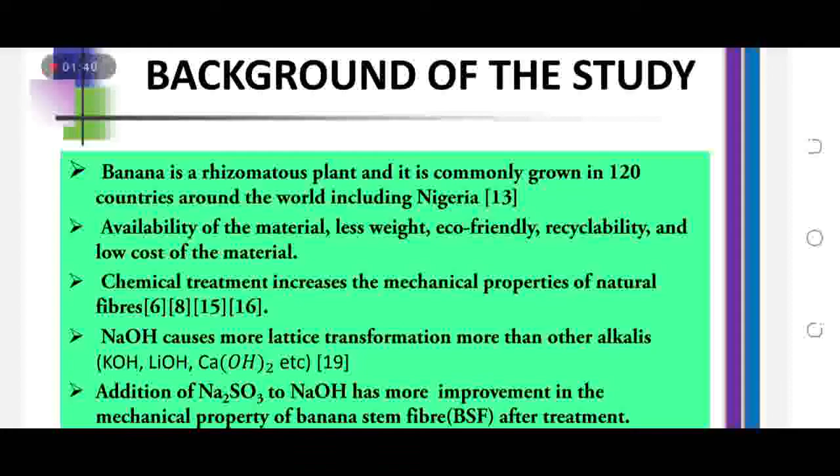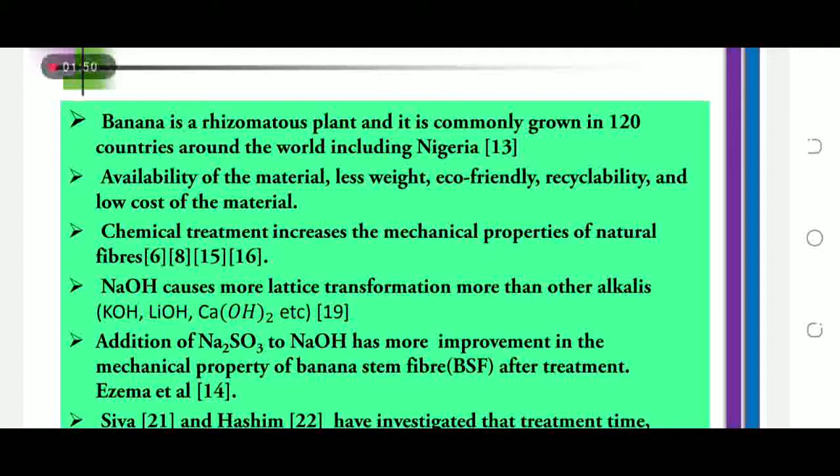Background of the study. Banana is a rhizomatous plant and is commonly grown in 120 countries around the world, including Nigeria. It's available all year round and is eco-friendly and can also be recycled, and it's also a low-cost material.

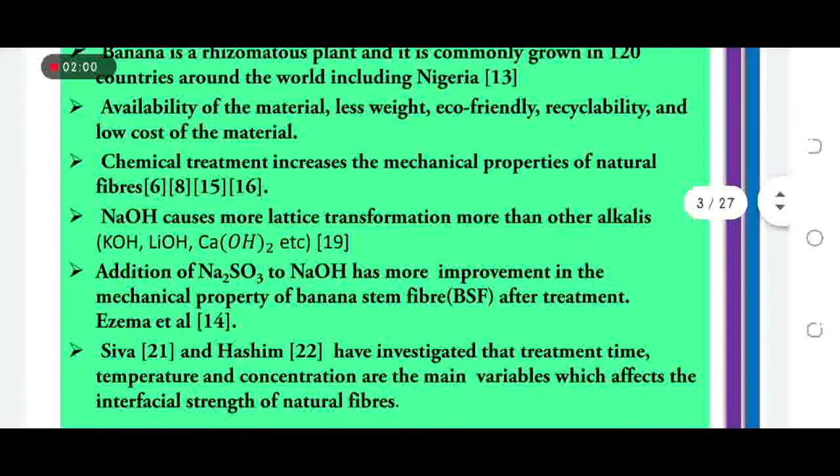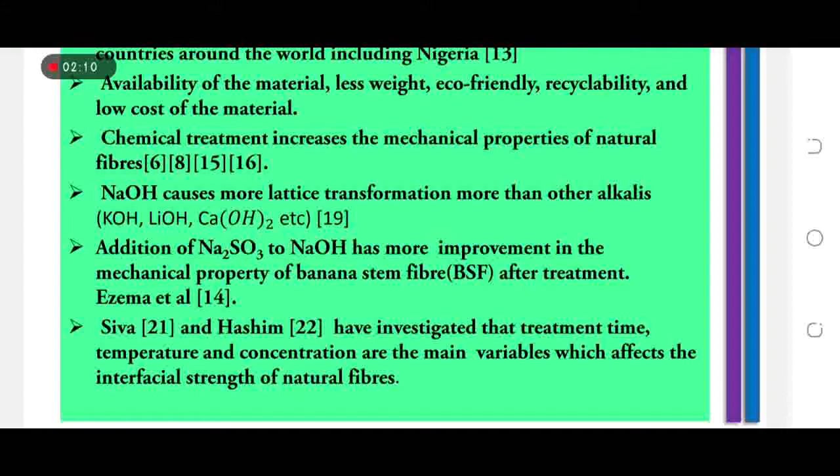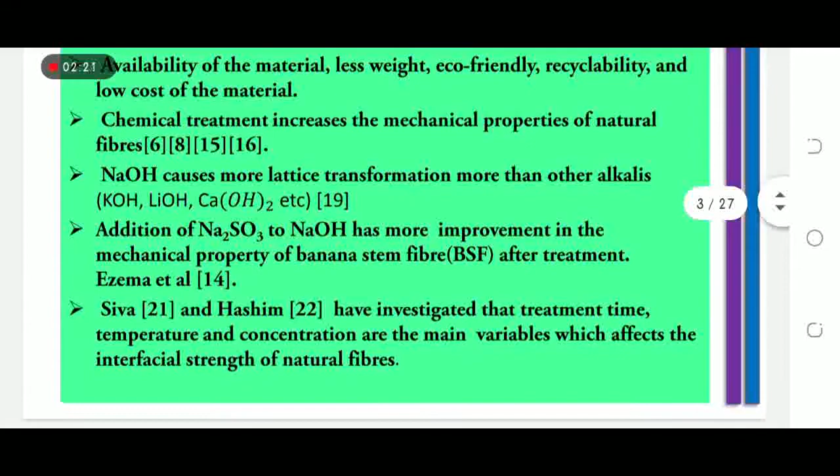It has been established that chemical treatment increases the mechanical properties of natural fiber. Sodium hydroxide causes more lattice transformation than other alkalis such as potassium hydroxide, lithium hydroxide, calcium hydroxide, etc. In a separate research done by Ezema et al., we found that addition of sodium sulphite to this sodium hydroxide had more improvement in the mechanical properties of the banana stem fiber after treatment.

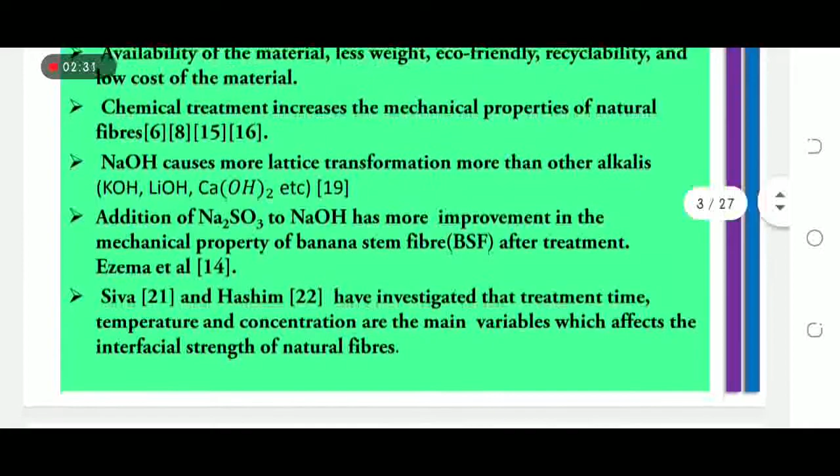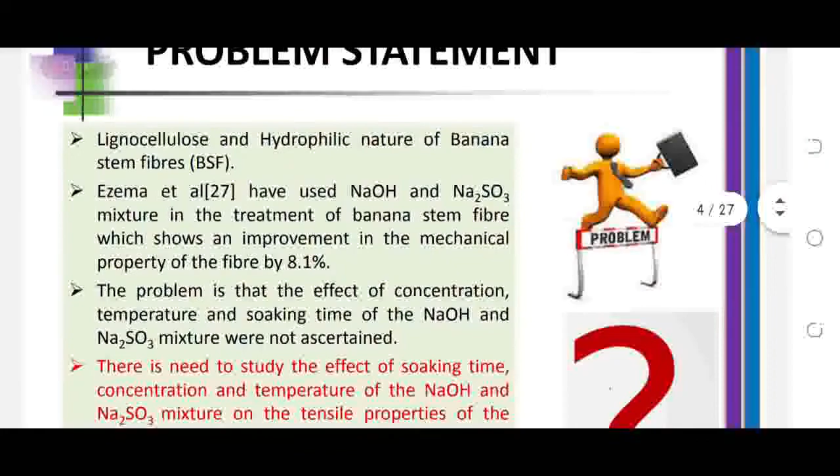Siva and Hashim have investigated that treatment time, temperature, and concentration are the main variables which affect interfacial strength of our natural fibers. The lignocellulose and hydrophilic nature of banana stem fibers is what hinders them from being used as a reinforcement material in composite, because they absorb moisture and there is no interfacial bonding between the fiber and the matrix.

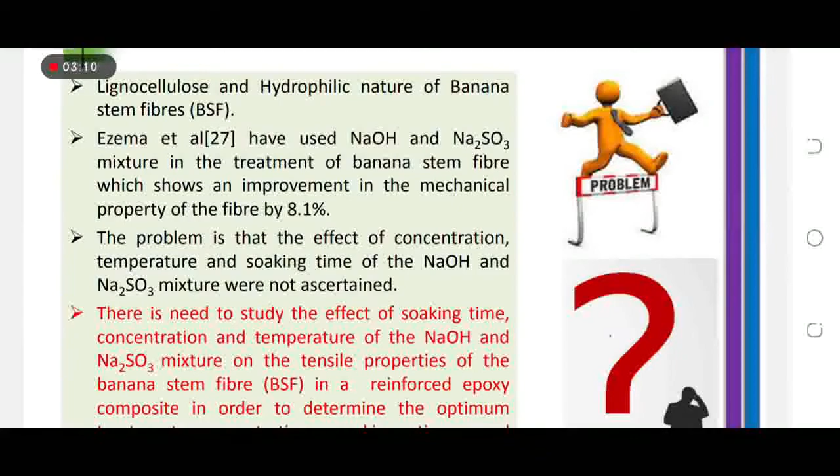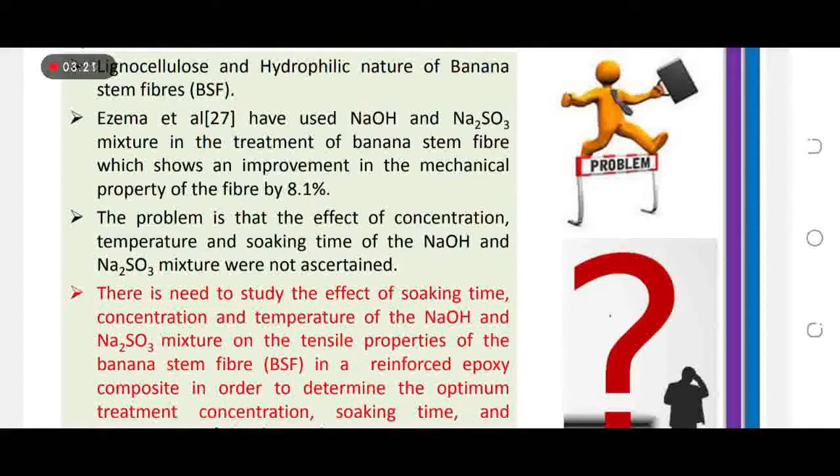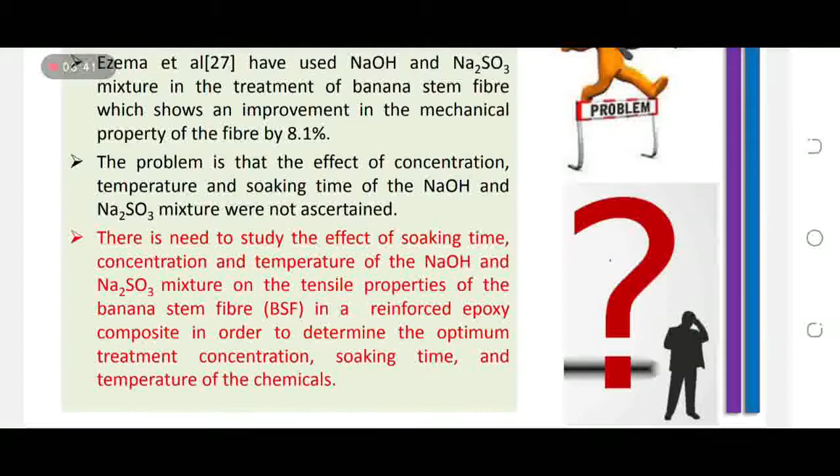So Ezema et al. have used sodium hydroxide and sodium sulphite mixture in the treatment of banana stem fiber, which shows an improvement in the mechanical properties of the fiber by 8.1%. The problem is that the effect of concentration, temperature, and soaking time of the NaOH and sodium sulphite mixture were not ascertained. So we find that there is a need to study the effect of these parameters in NaOH and Na2SO3 mixture on the tensile properties of the banana stem in a reinforced epoxy composite in order to determine the optimum treatment concentration, time, and temperature of the chemicals.

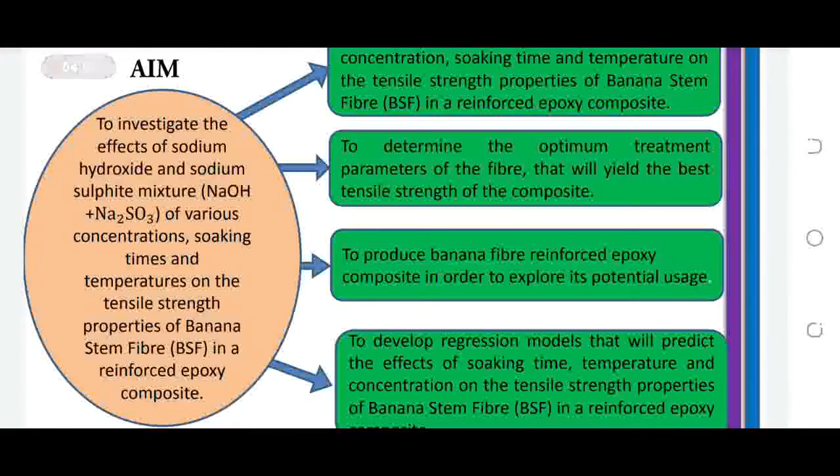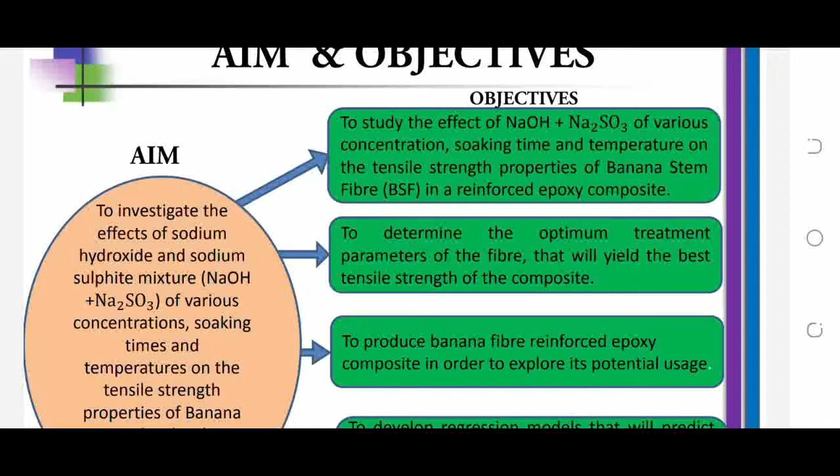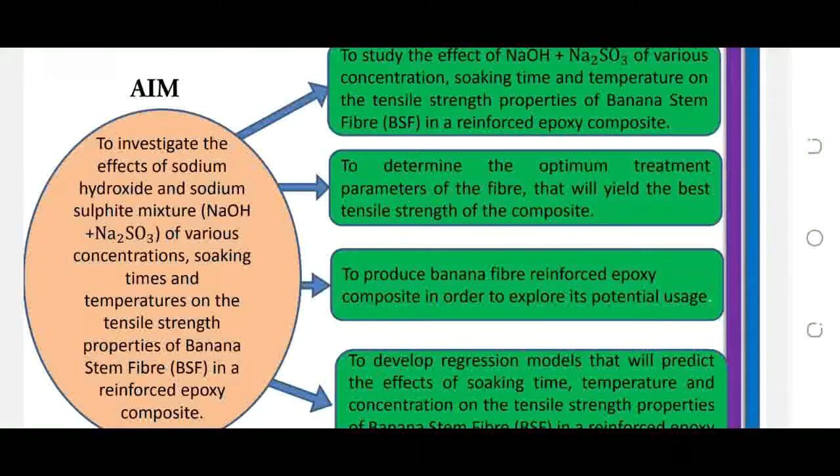Aim and objective. The main aim of this study is to investigate the effect of sodium hydroxide and sodium sulphite mixture of various concentration, soaking times, and temperatures on the tensile strength properties of banana stem fiber in a reinforced epoxy composite. The objectives are to study the effect of NaOH plus Na2SO3 of various concentration, soaking time, and temperature on the tensile strength properties of banana stem fiber, and to determine the optimum treatment parameters of the fiber that will yield the best tensile strength of the composite.

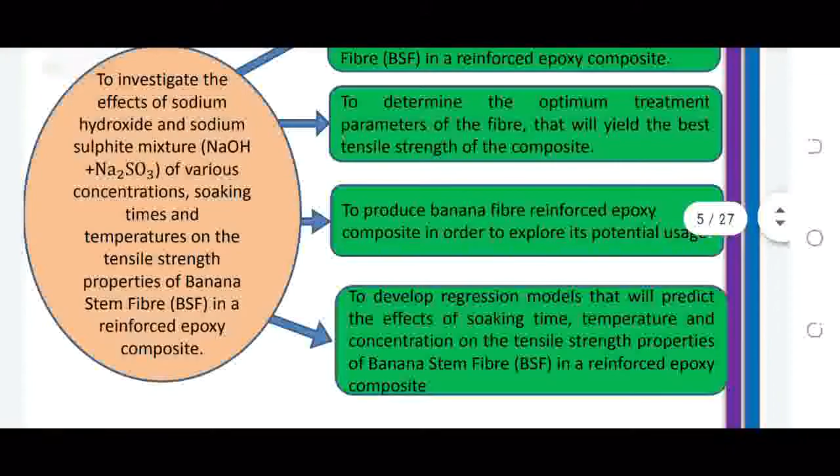The third objective is to produce banana fiber composite in order to explore its potential usage. The fourth is to develop regression models that will predict the effect of soaking time, temperature, and concentration on the tensile strength properties of banana fiber in a reinforced epoxy composite.

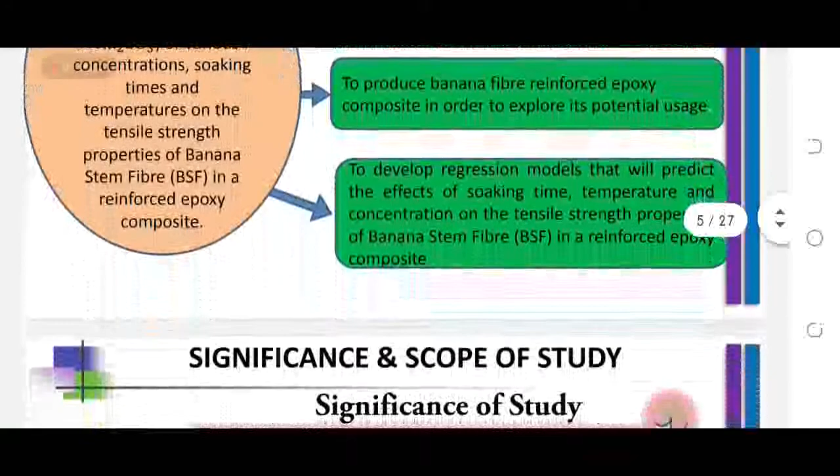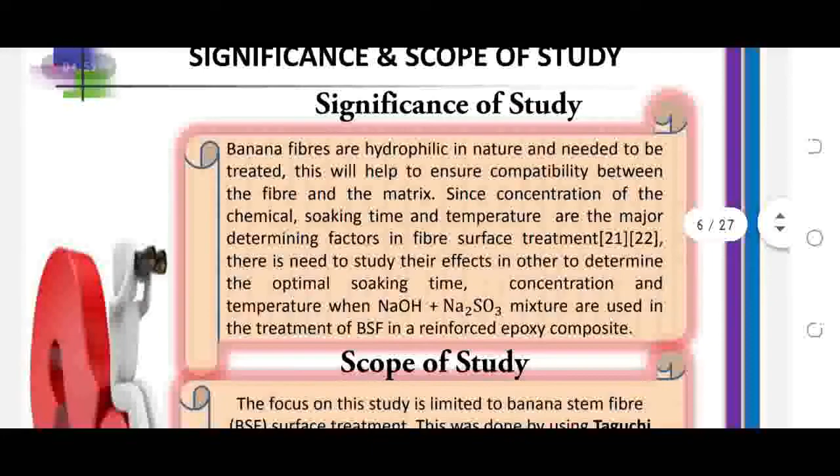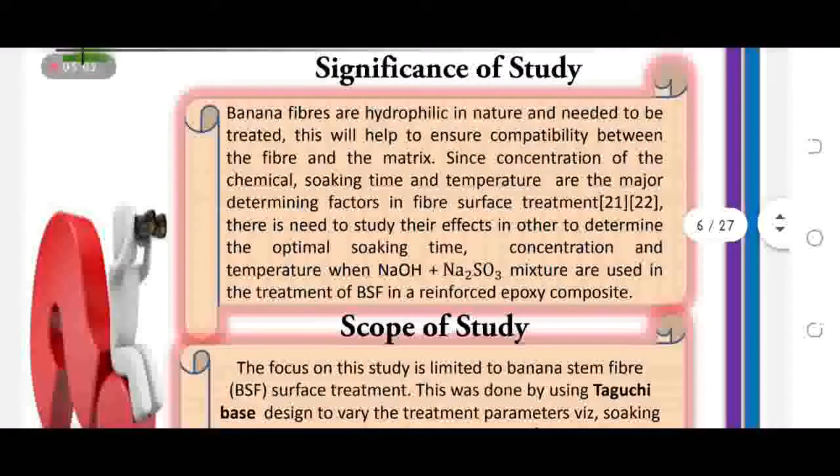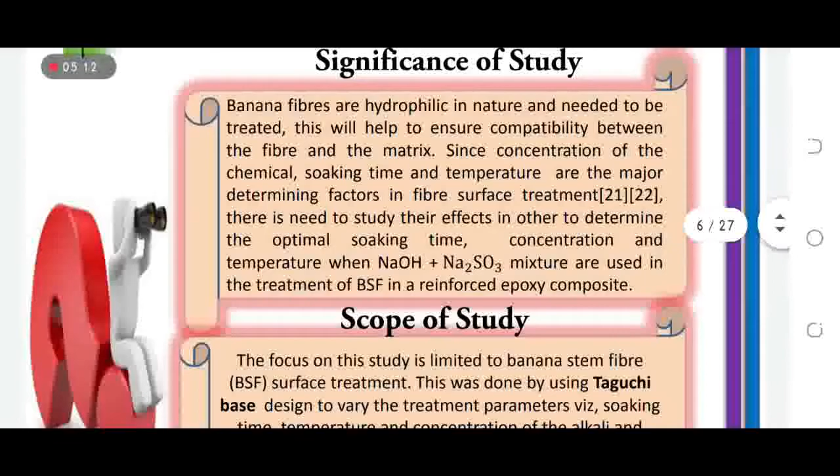Significance and scope of this study. The significance is that banana fiber is hydrophilic in nature and needs to be treated. This will help to ensure the compatibility between the fiber and the matrix. And since concentration of chemical, soaking time, and temperature are the major determining factors in fiber surface treatment, there is need to study the effects in order to determine the optimal soaking time, concentration, and temperature of the two mixture of chemicals that will give us the best treatment parameter in the reinforced epoxy composite.

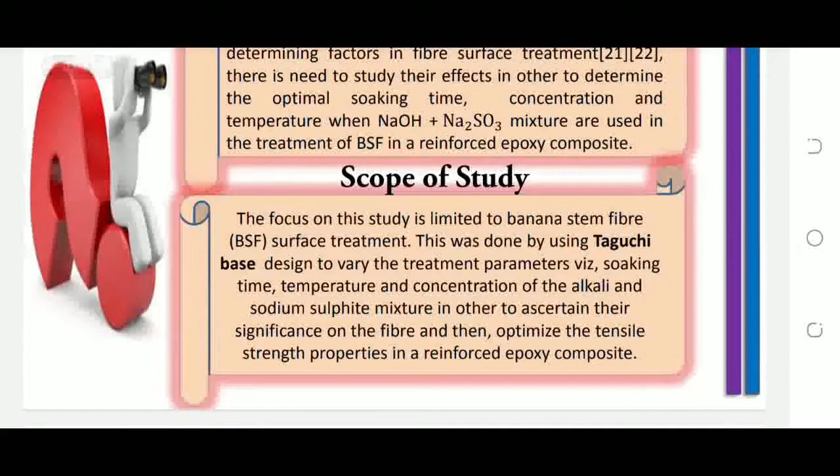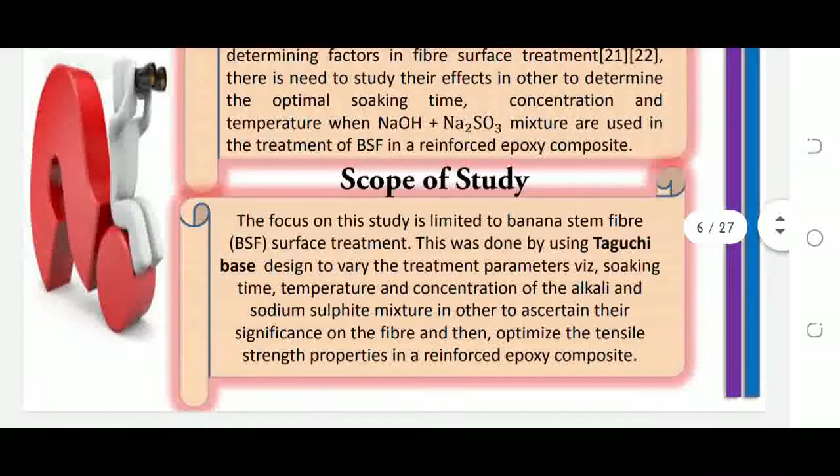The focus of this study is limited to banana stem fiber surface treatment. This was done using Taguchi-based design to vary the treatment parameters: soaking time, temperature, and concentration of the alkali and sodium sulphite mixture, in order to ascertain their significance on the fiber and then optimize the tensile strength properties in the reinforced epoxy composite. That's our scope for this study.

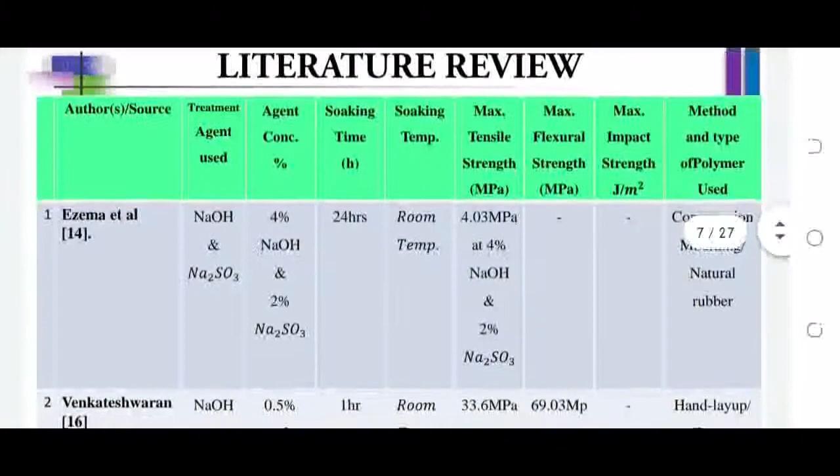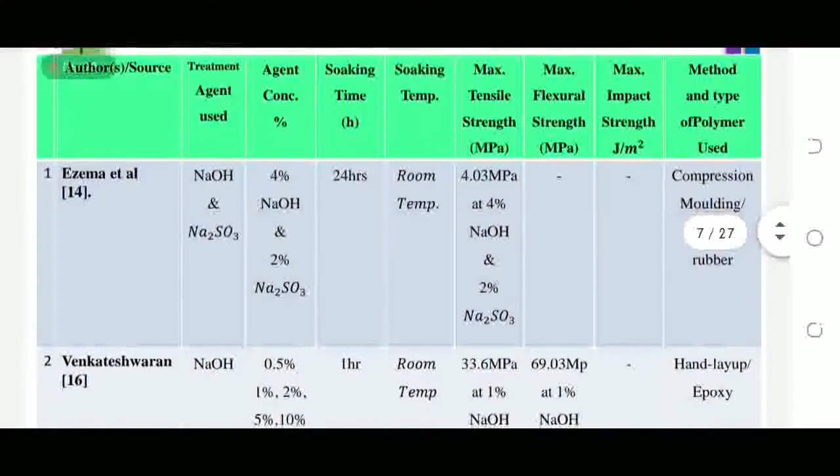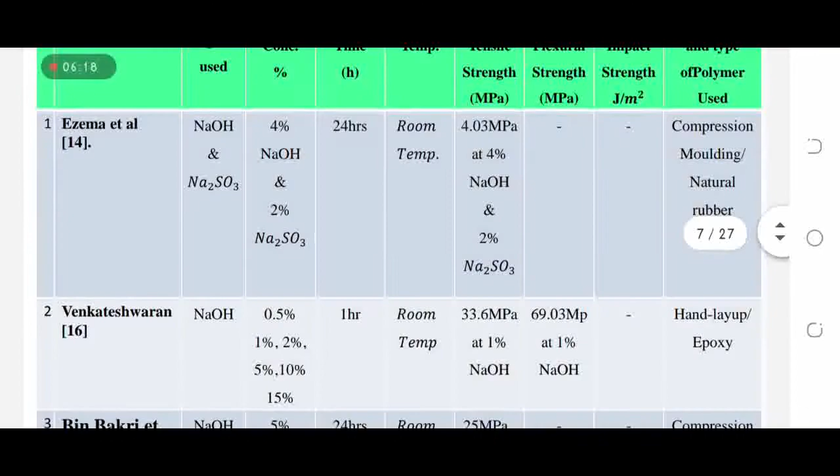Literature review. We saw that Ezema et al. treated with sodium hydroxide and sodium sulphite for 24 hours with a concentration of 4% for sodium hydroxide and 2% for sodium sulphite, and the maximum they got was 4.0 megapascal at 4% and 2% of the reagents. Venkateshwaran also did the same thing, but he treated with only sodium hydroxide, and at 1 hour he got 33.6 megapascal at 1% of the sodium hydroxide.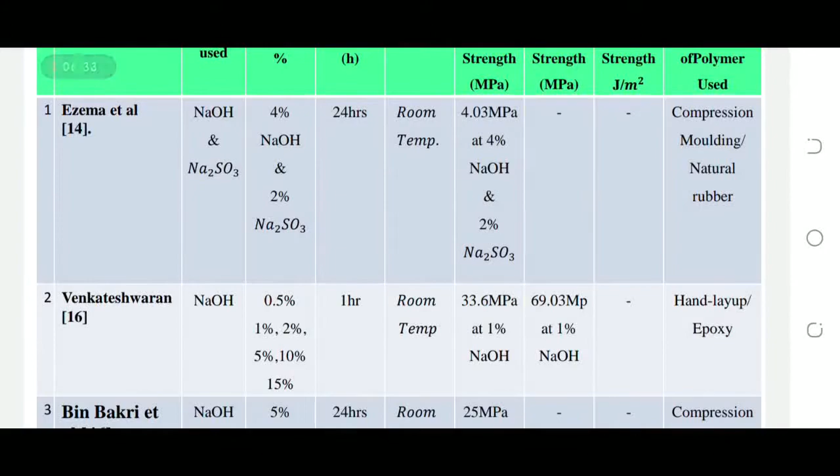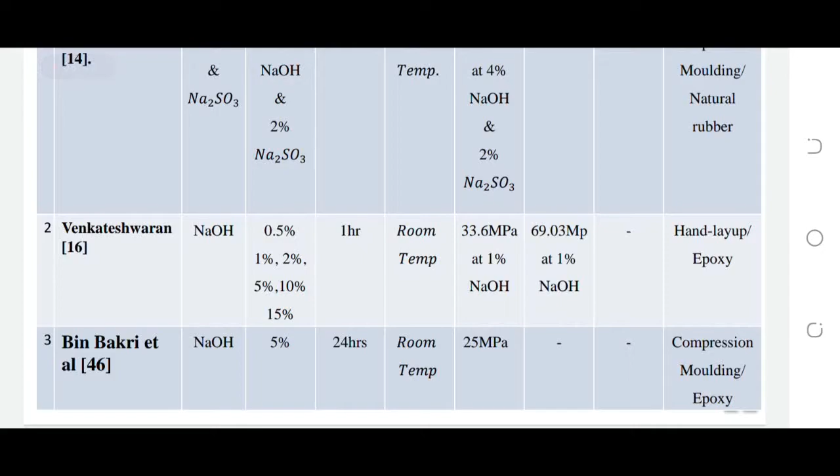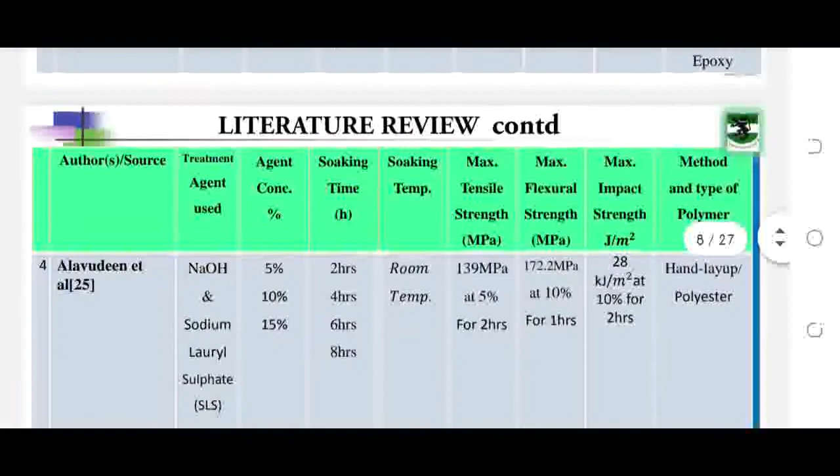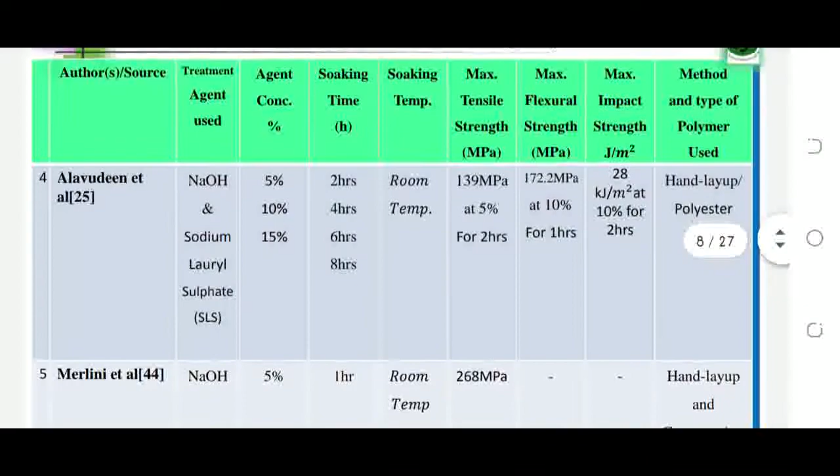Bin Bakri et al. did the same thing with 5% and treated for 24 hours, using epoxy for this and compression molding in fabrication. Alavudeen et al. did the same thing, with concentration of 5%, 10%, and 15%. Merlini et al. studied with sodium hydroxide, treated at 5% for 1 hour. Jannah et al. used these parameters as well.

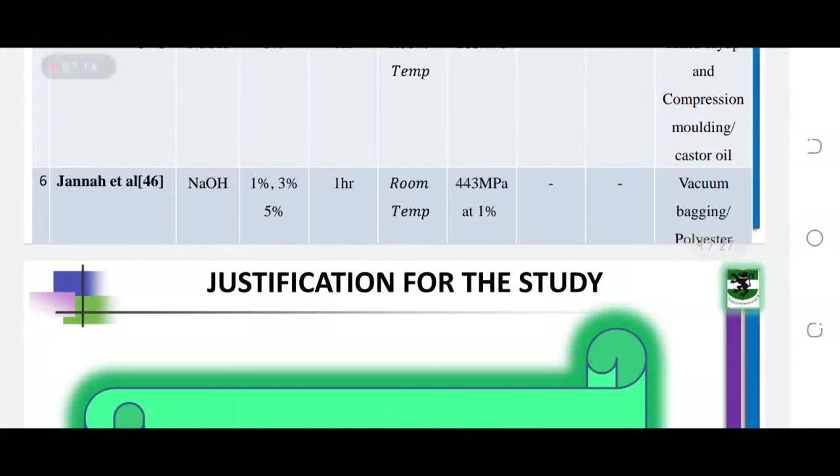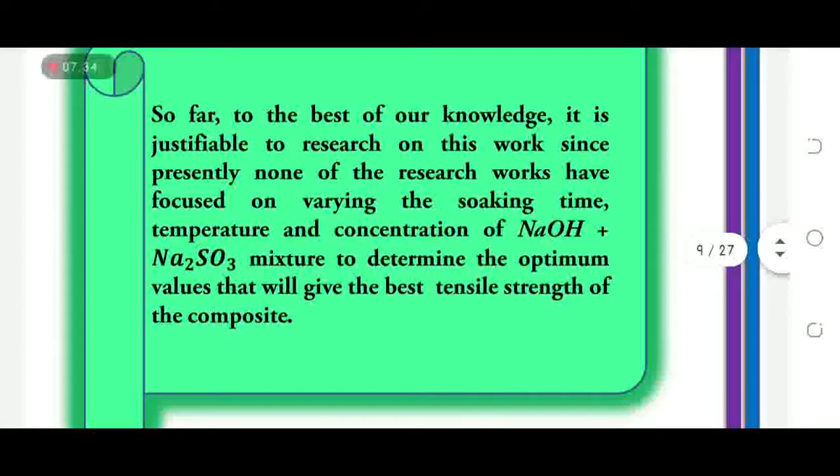Justification for the study. So far, to the best of our knowledge, it is justifiable to research on this work since presently none of the research works are focused on varying the soaking time, temperature, and concentration of the NaOH plus Na2SO3 mixture to determine the optimal values that will give the best tensile strength of the composite.

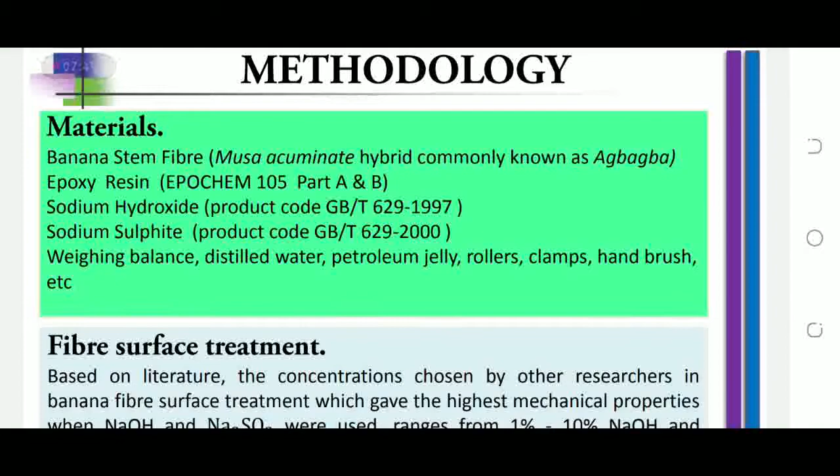Methodology. The materials we use for this research are banana stem fiber, epoxy resin with EPOCHEM 105 part A and part B, where part B is the hardener, sodium hydroxide with its product code, and sodium sulphite with its product code.

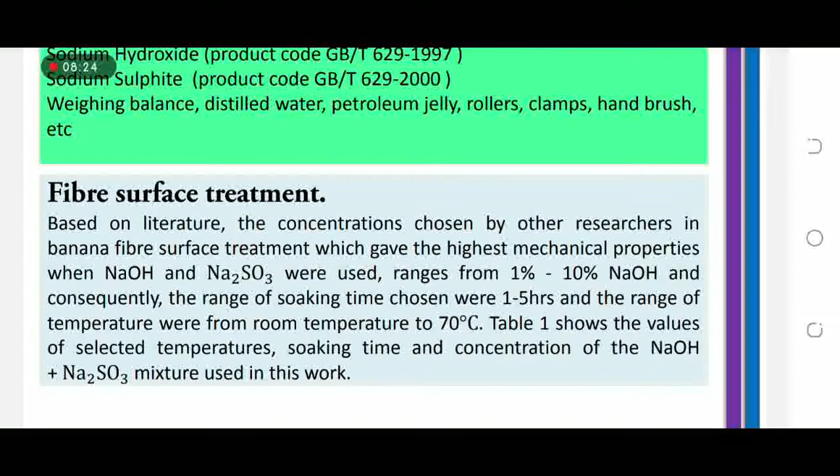So the fiber treatment, surface treatment. How we selected our parameters is based on literature we conducted, the concentrations chosen by other researchers in banana fiber surface treatments, which gave the highest mechanical properties when sodium hydroxide and sodium sulphite were used, ranges from 1% to 10%. Consequently, the soaking time ranged from 1 hour to 5 hours, and temperature ranged from room temperature to 70 degrees Celsius. This helped us determine the range of parameters which we chose.

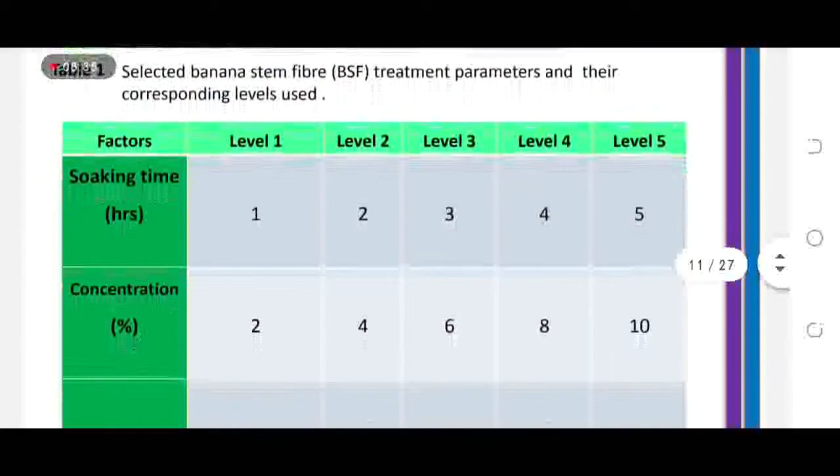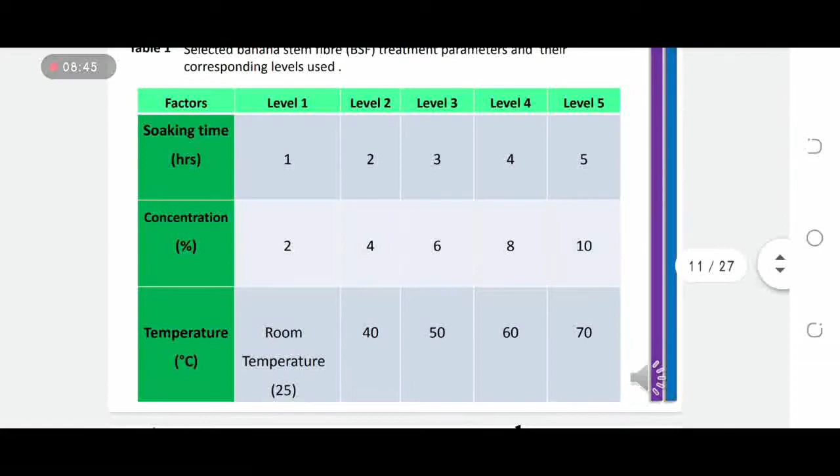Below in table 1 is the chosen parameters for this research. You see we have a selected parameter: soaking time of 1 hour, 2 hours, 3 hours, 4 hours, and 5 hours. Concentration: 2%, 4%, 6%, 8%, and 10%. For sodium hydroxide we chose 2%, sodium sulphite we chose 2%. Temperature started from room temperature to 70 degrees Celsius.

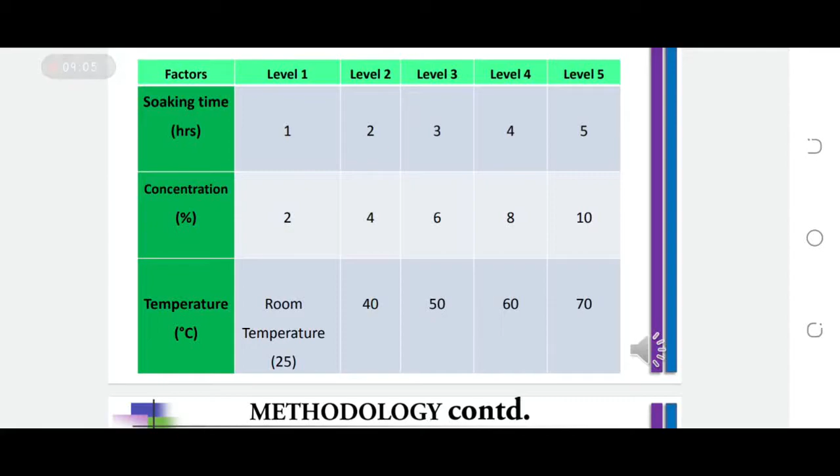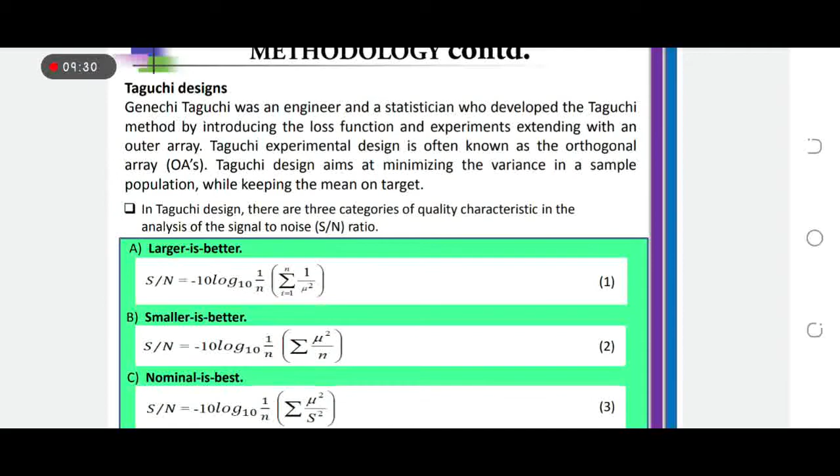For methodology, we use the Taguchi based design for this experiment. Taguchi was an engineer and statistician who developed the Taguchi method by introducing the loss function and experiments extending with an outer array. The three equations Taguchi generated for quality loss function are: larger is better, smaller is better, and nominal is best. Because we are looking for increased optimal value, we're using larger is better signal to noise ratio in our analysis.

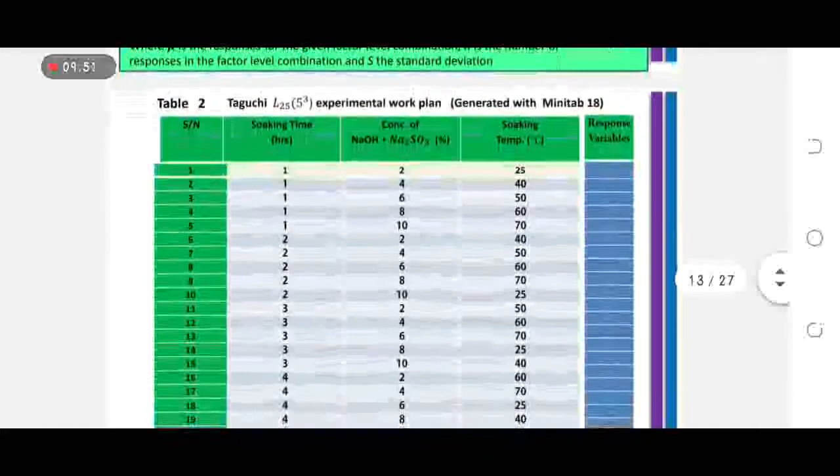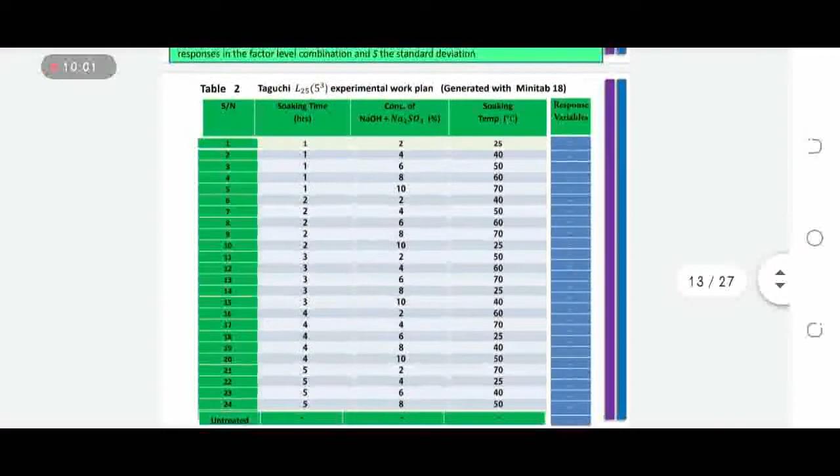Table 2 shows the Taguchi generated design. We see that each of the parameters has 5 levels, so we have 25 experimental runs in our Taguchi design. Our experimental setup is shown in figure 1.

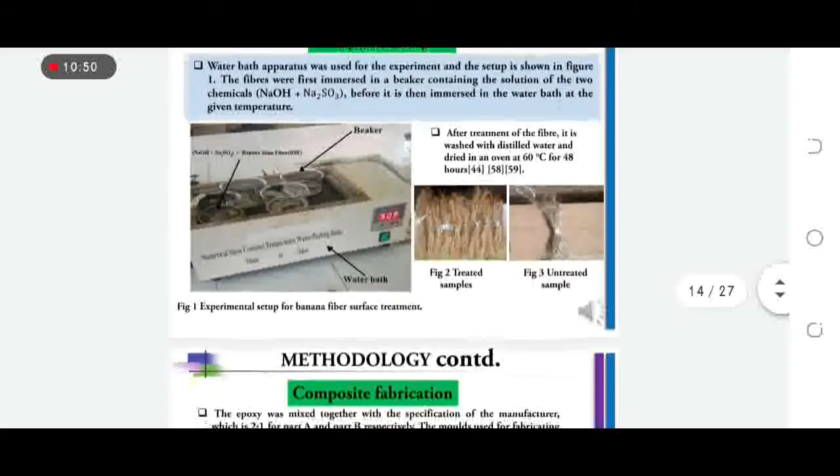Figure 2 is the treated sample, while figure 3 is the untreated sample. For composite fabrication, we fabricate our composite based on ASTM standard, and hand layup technique was used to laminate the composite. Equation 1 shows the formula we used to calculate our volume fraction.

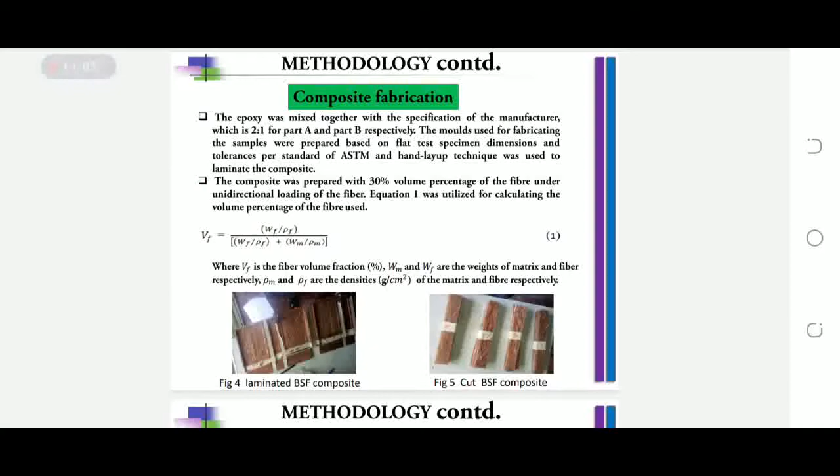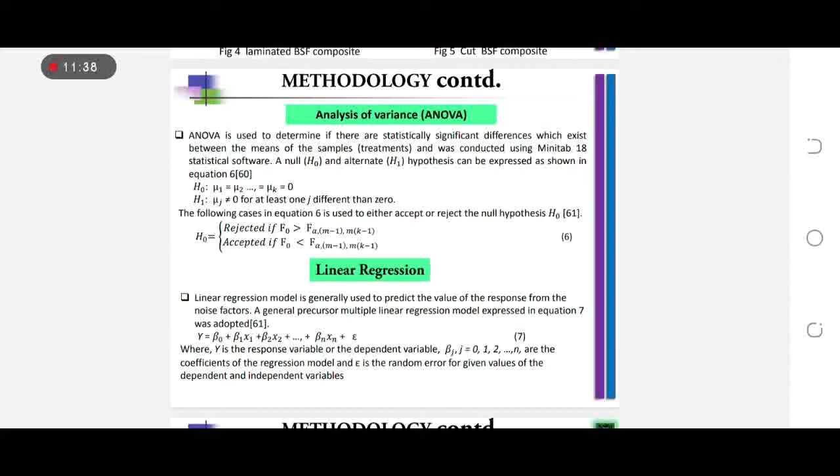We used analysis of variance to analyze our data, and a linear regression model was generated based on equation 7. Then ANOVA was done, shown in equation 6. If the observed value is greater than the critical value, we reject the null hypothesis, but if it's less than the critical value, we accept the null hypothesis. This was done at 95% significance level of the data.

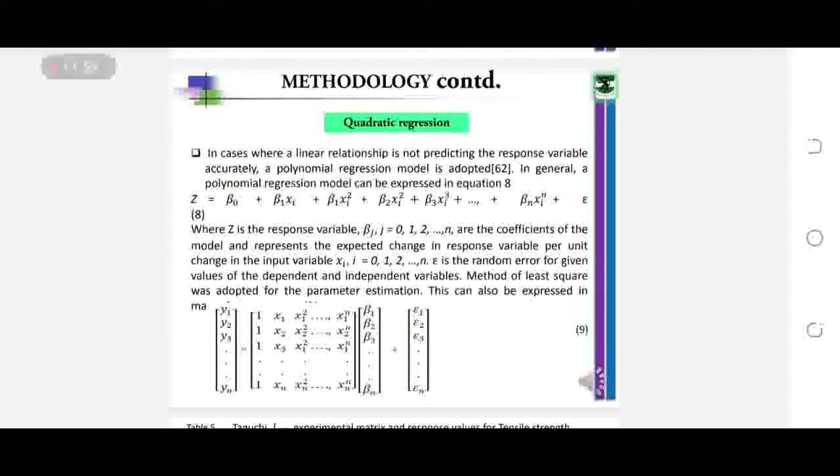A quadratic regression model was also generated. The precursor quadratic equation in equation 8 was adopted, and equation 9 is the matrix form of equation 8.

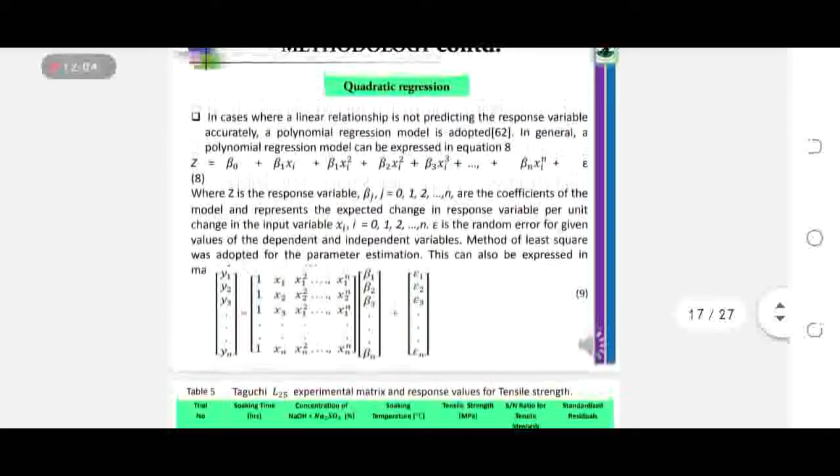This generated experimental matrix and response value for tensile strength is shown in table 5. Below we have untreated, which gave us 62.27.

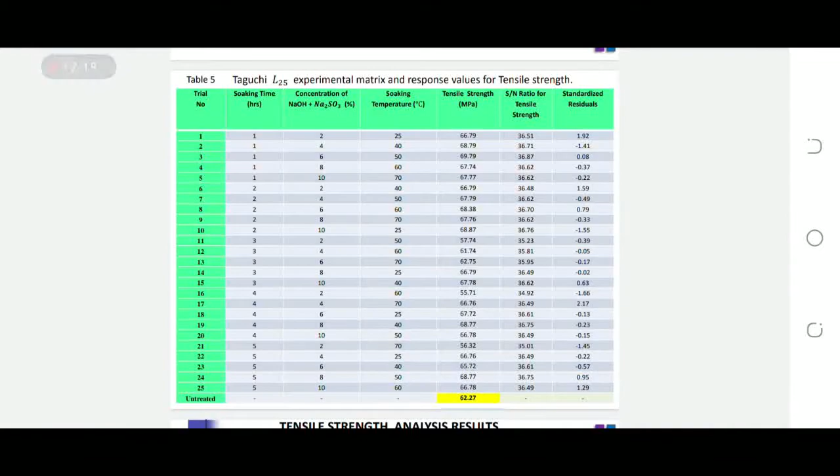Table 4 shows the response table which we generated from Taguchi's design, and it's shown graphically that soaking time of 1 hour gave us the highest mechanical property, and 8% concentration, then temperature of 40 degrees, all give us the highest parameters, which give us the highest tensile strength property of the fiber.

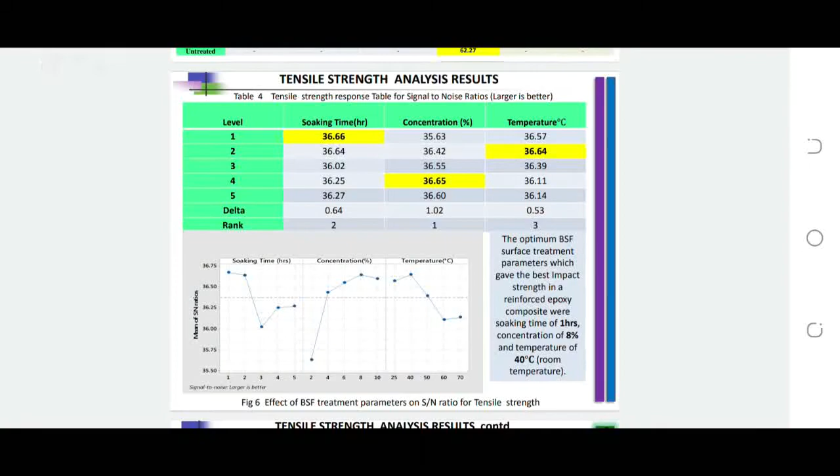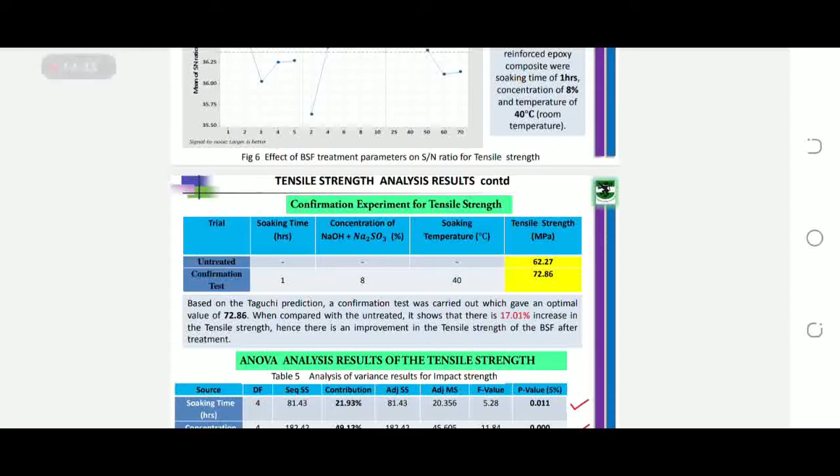So we went back to the lab to compare our regression, the experimental optimal values which the Taguchi based design gave us, to the untreated. We did a confirmation experiment based on those parameters, and we saw that there is 72.86 megapascal of strength. When we compare it with the original untreated, we found out that there is a 17.01% increase in the tensile strength. Hence, there is improvement in the tensile strength of the banana stem fiber after treatment.

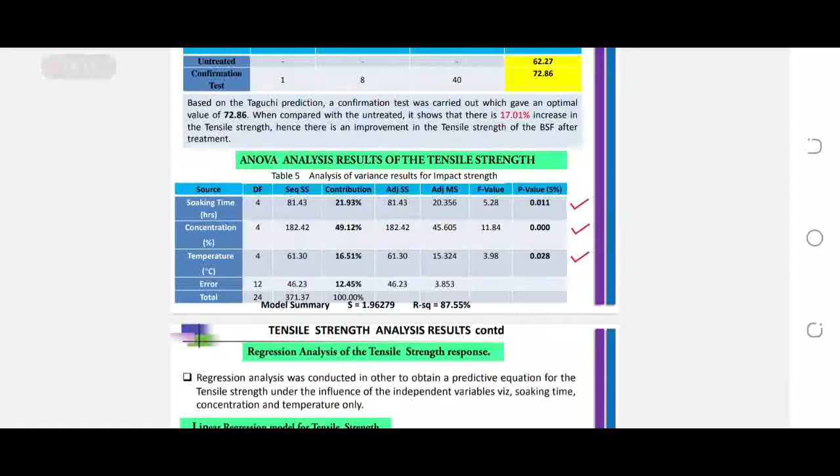Table 5 also shows us that the ANOVA analysis results in tensile strength show that all the parameters were significant, with concentration the most significant, with a contribution of 49.12%, followed by the soaking time and then temperature. The regression model generated is the linear regression model, while equation 15 is the quadratic regression model.

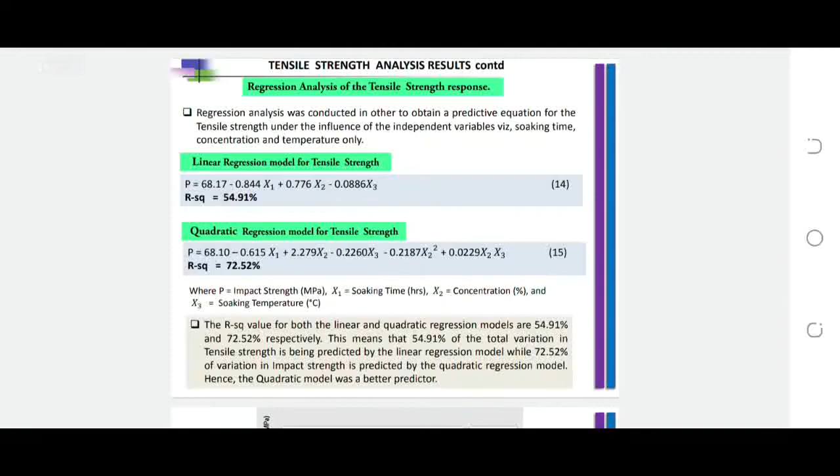You see the R-square value, which shows that the contribution of these parameters is 72.52%. That shows the variation, which shows how the parameters are contributing to the mechanical and tensile properties of the fiber.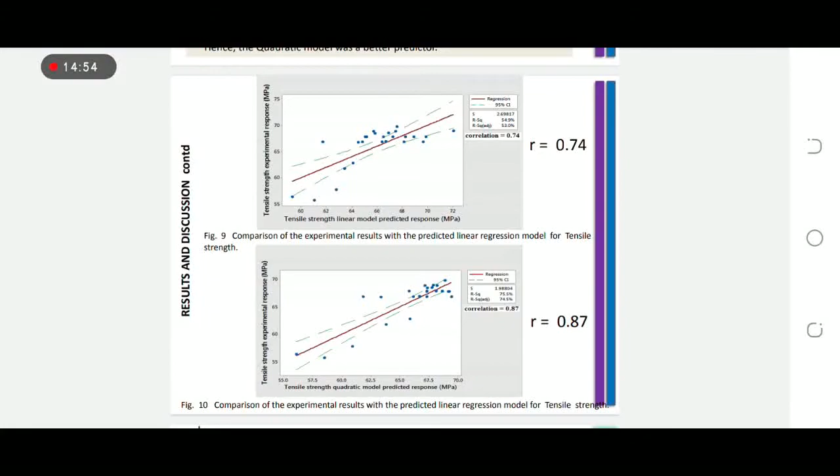The graphs in figure 9 and figure 10 show us the comparison of experimental results with the predicted linear regression model for the tensile strength. The comparison between the two shows that the model we generated for the quadratic regression model is predicting better, with a correlation coefficient of 0.87, more than the linear regression model.

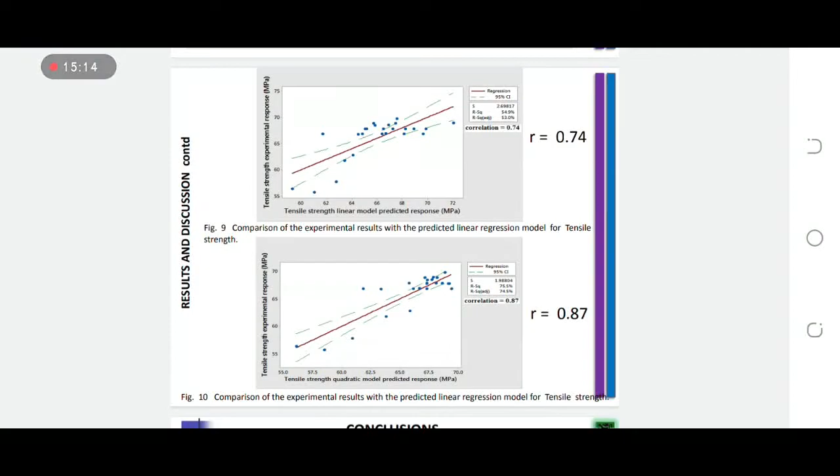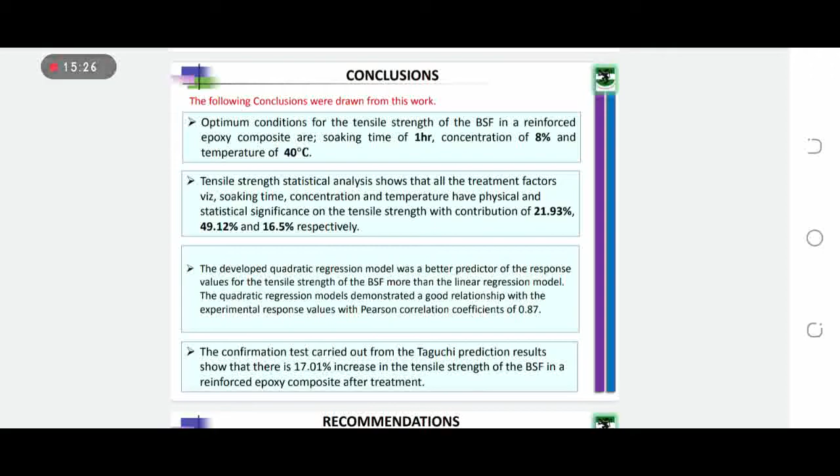We concluded that the optimum condition for the tensile strength of the banana stem fiber composite are soaking time of 1 hour, concentration of 8%, and temperature of 40 degrees. The tensile strength analysis shows contributions of 21.9% for soaking time, 49.12% for concentration, and 16.5% for temperature.

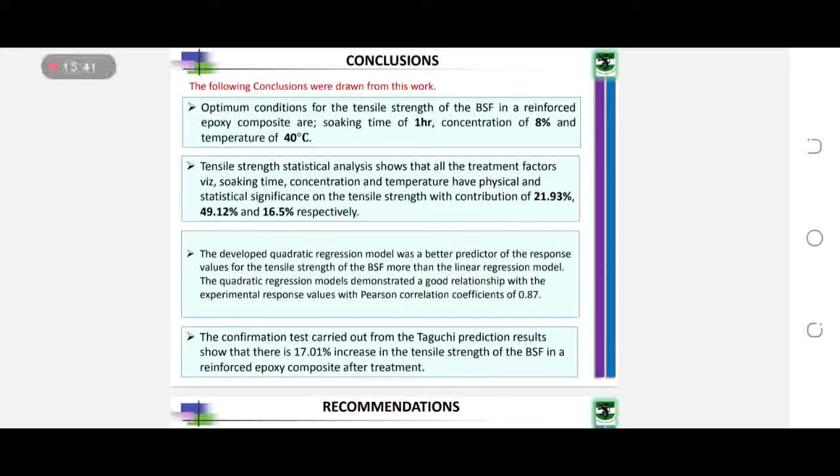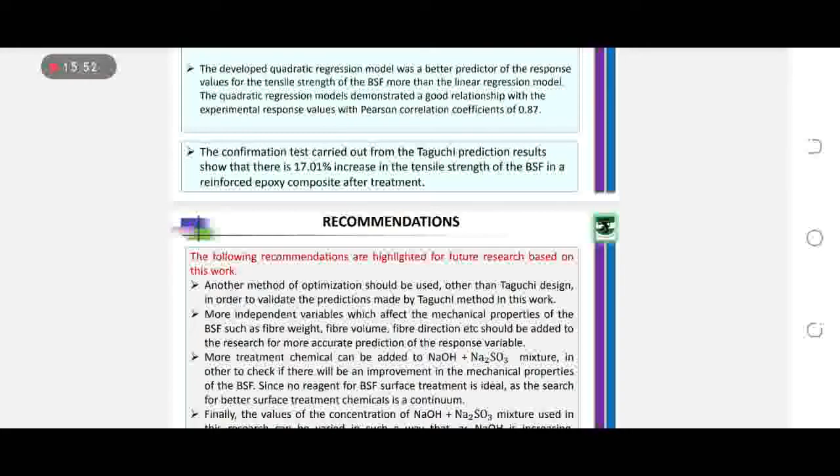The developed quadratic regression was a better predictor, and the confirmation test shows that there is a 17.01% increase in the tensile strength of the banana fiber after treatment.

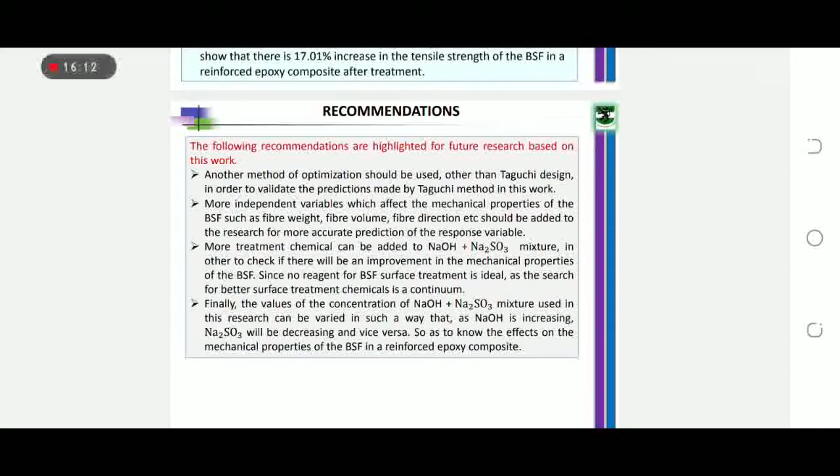As recommendation, we recommend that another method of optimization should be used other than Taguchi in order to validate the predictions made by Taguchi in this work. More independent variables which affect the mechanical properties of the fiber, such as weight, fiber volume, fiber direction, etc., should be added to it.